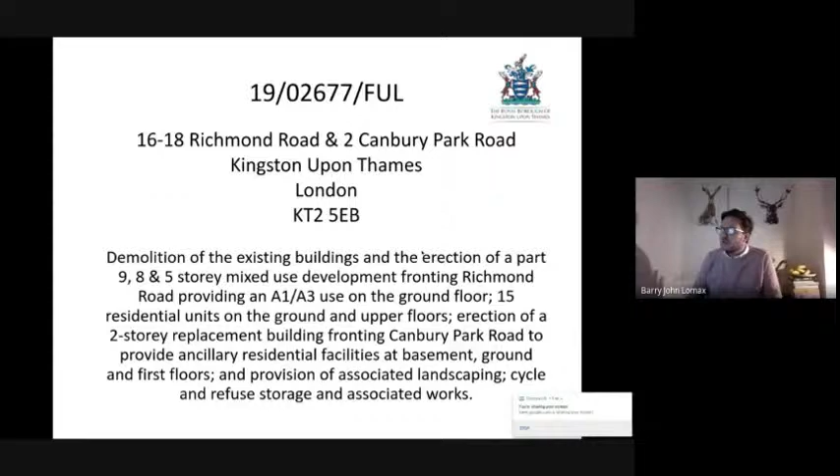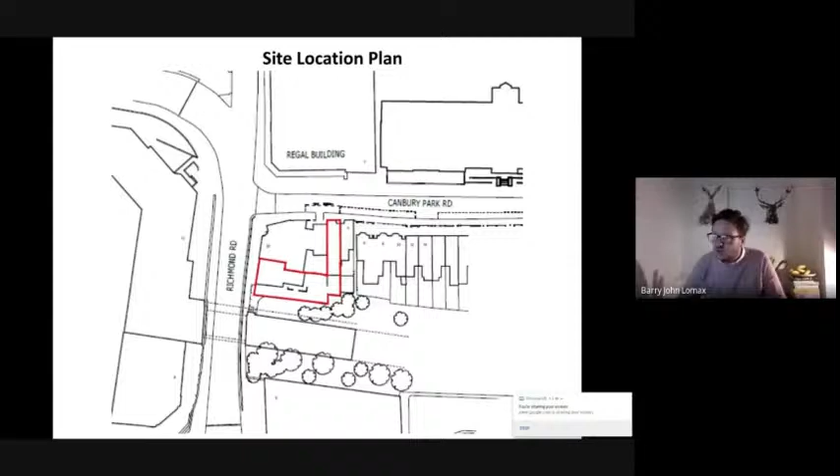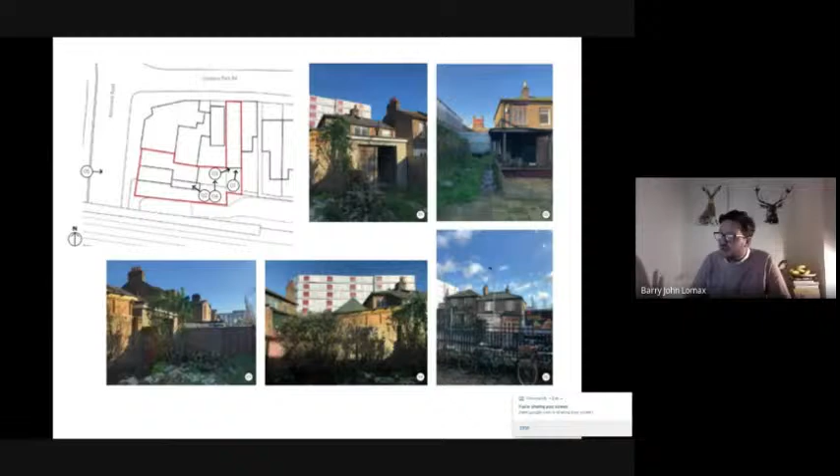If I take you around the top, you see number 1, the rear of number 2 Canbury Park Road. Going around number 2, we have another view inside, this time pointing back towards the Richmond Road properties. Then we have a view from the railway station, and 2 other views from within the application site looking towards Canbury Park Road. This is a clearer photograph, showing the rear of 16 to 18 looking towards the railway station. And this is a site looking towards a building being constructed on a neighbouring property, as part of the tattoo parlour.

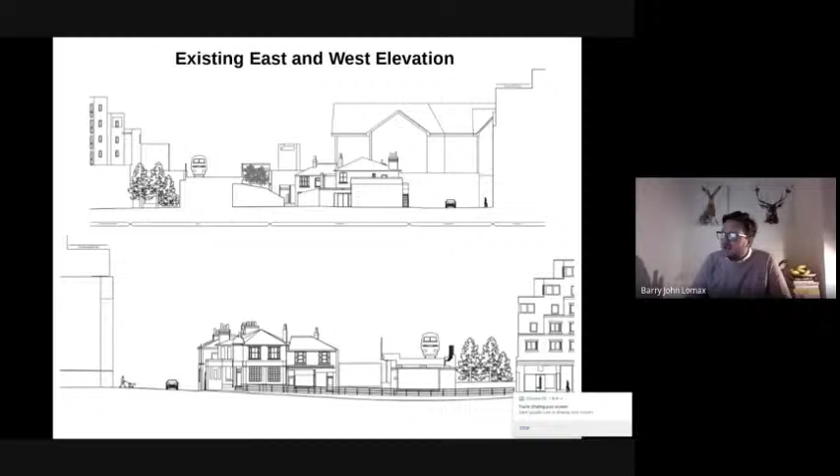So the existing site plan, and then some existing elevations going around the site, and then we come to the proposal. The proposal is for the demolition of the existing building and its replacement with the erection of a Part 9, 8 and 5-storey mixed-use development fronting Richmond Road. Also included is the erection of a 2-storey replacement building, which would be connected to number 4 Canbury Park Road, so as to provide the second half of the semi-detached properties, containing ancillary residential accommodation at basement, ground and first floors. There's then a retail cafe unit proposed on the ground floor fronting Richmond Road.

This would now be a Class E use, although if minded to approve, members might want to restrict it to a cafe retail use. There would be 15 residential units, of which 4 would be studios, 6 would be 1-bed, 4 would be 2-bed, and there would be a 3-bed unit. The application proposes the provision of a single affordable unit, a shared ownership 1-bedroom, 2-person unit, and cycle parking for 25 spaces, 24 within a dedicated store and 1 within a dedicated space within the courtyard of unit number 1.

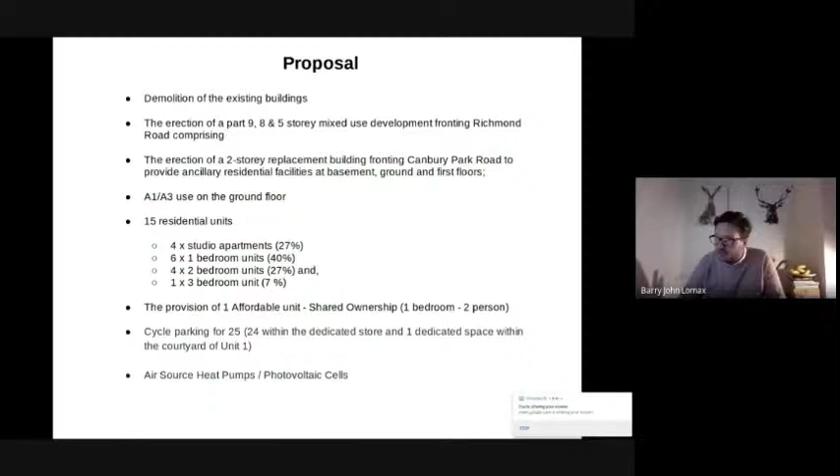The property would be served by air source heat pumps and by photovoltaic cells. If I now take you through the plans in slightly more detail, this shows the proposed site plan.

Starting from the basement of the property on Canbury Park Road, this would be ancillary accommodation which would house some of the servicing, the mechanical and electrical equipment.

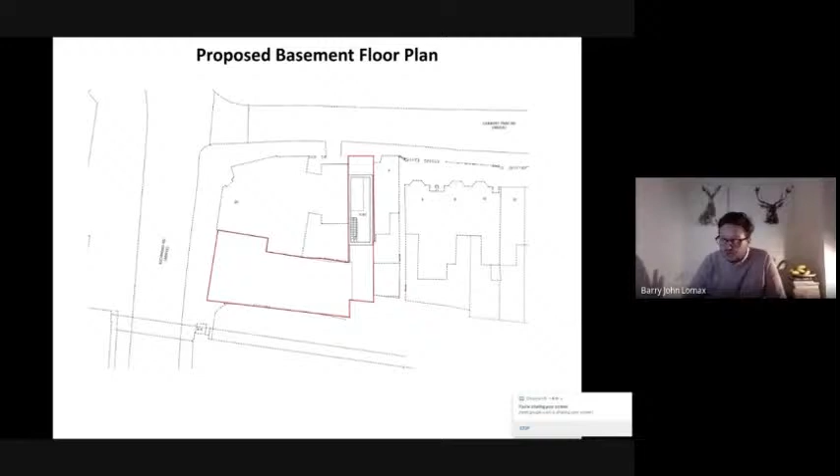Moving up to the ground floor, residential access would be provided from Canbury Park Road through an entrance where you would meet the refuse store, an entrance to the refuse store, and then around into the residential property with a studio unit on the ground floor with a terrace, some communal space, and then the cycle storage would be in that building fronting Richmond Road.

The access to the retail space or the retail unit, the A1, A3 / Class E unit, would come from Richmond Road.

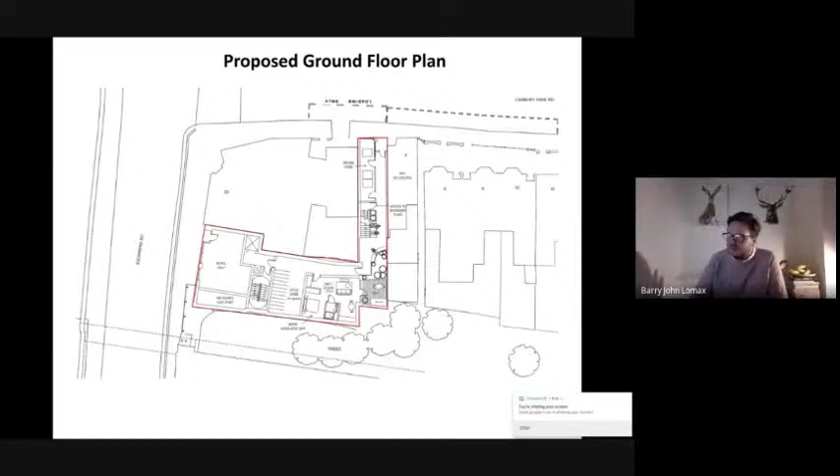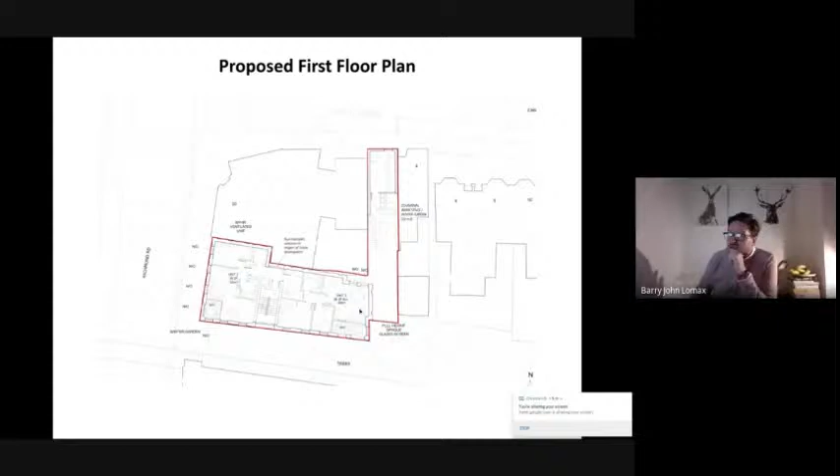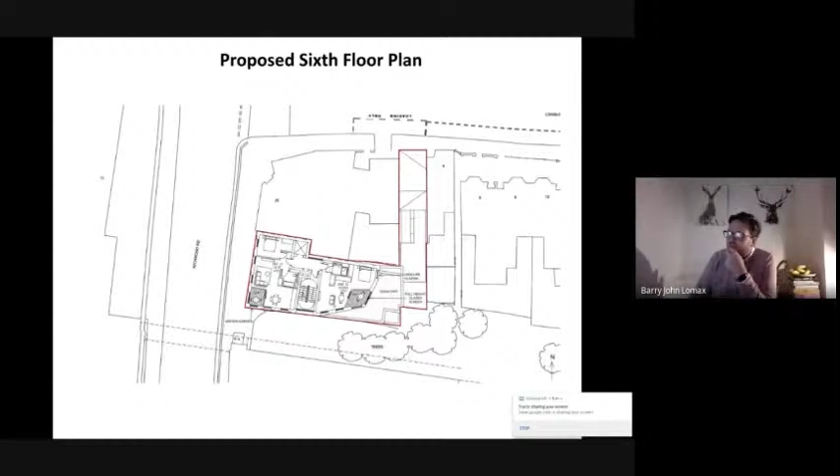Moving up on the second floor, with residential accommodation coming through the floors, and then stepping back when you get to the 5th floor, 6th, 7th, and then at the 8th floor, you have a further step back and you have a terrace space for the uppermost flat.

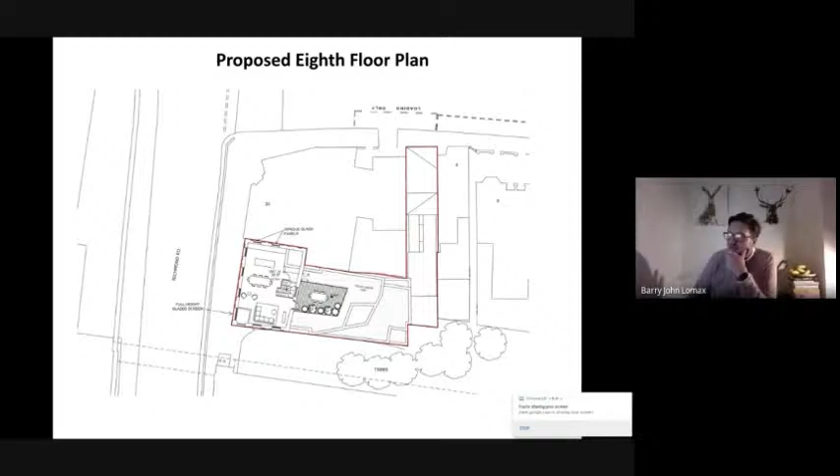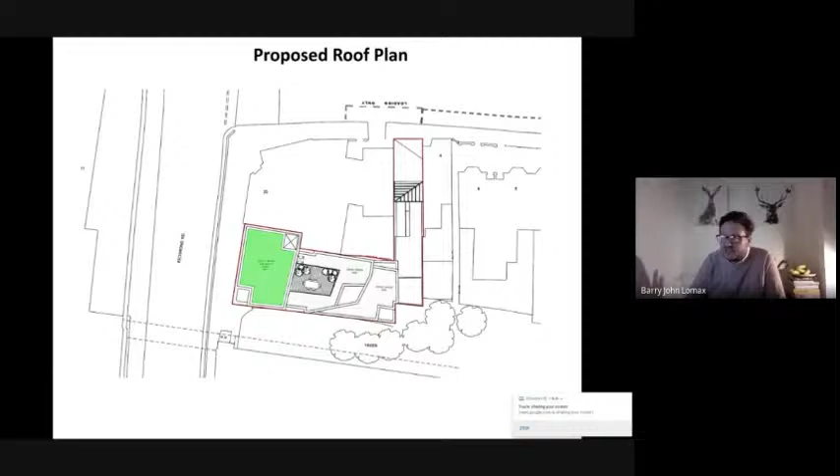We have a proposed roof plan. All of the flat roofs are proposed to be green or brown roofs as part of the drainage or the surface water drainage strategy. A proposed section through the site showing this is taken from the railway line cutting through the site.

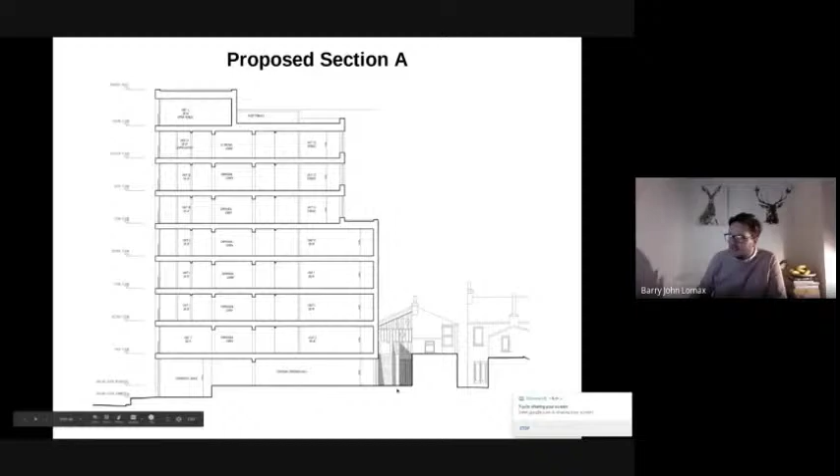You see on the right hand side the property number 2 Canbury Park Road, which would at the first floor be that communal space, at the ground floor refuse with access to the side.

This is the proposed west elevation, the elevation which would front Richmond Road. The proposed building at its height, at its maximum, would be 28.4 metres and it'd be 10 metres wide.

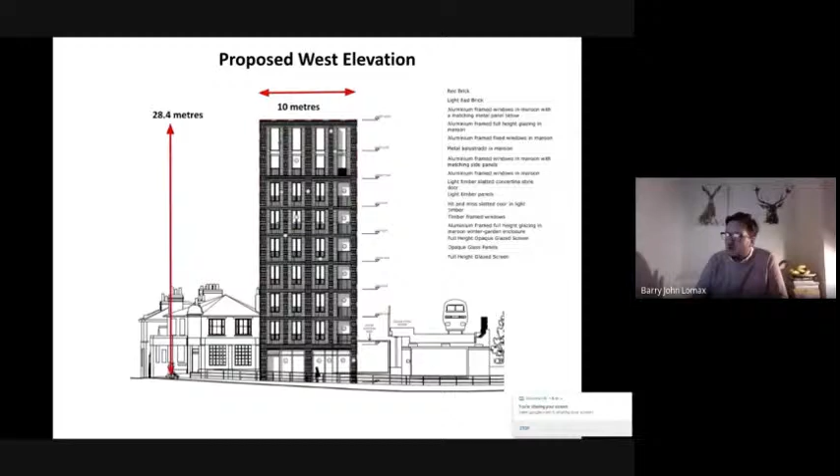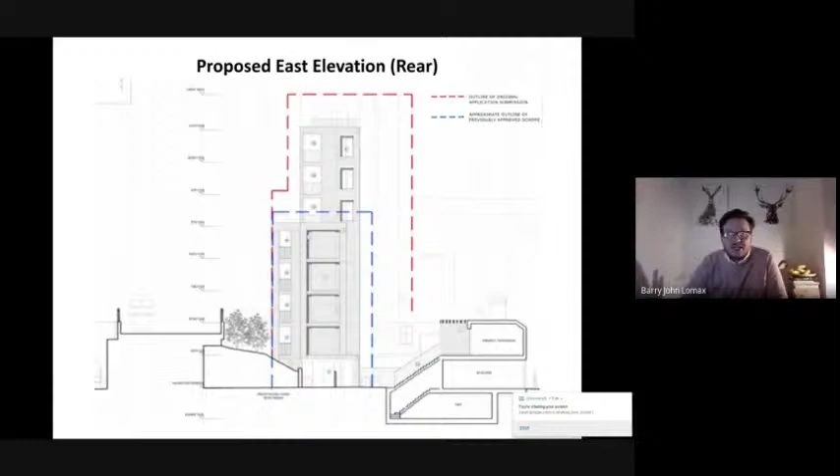Looking at the proposed elevation to the rear, this plan indicates in red the scheme as it was originally submitted. Unfortunately this plan isn't very clear, but other plans will become clearer. The blue indicates the scheme which has consent on site granted at appeal.

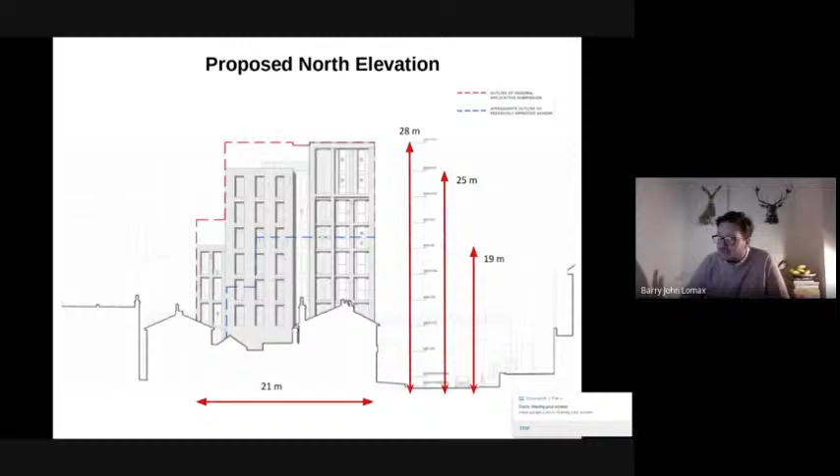This is taken from the north elevation looking back. You see again the maximum height around 28, dropping down to 25 and then down again to 19 metres with a depth of 21 metres.

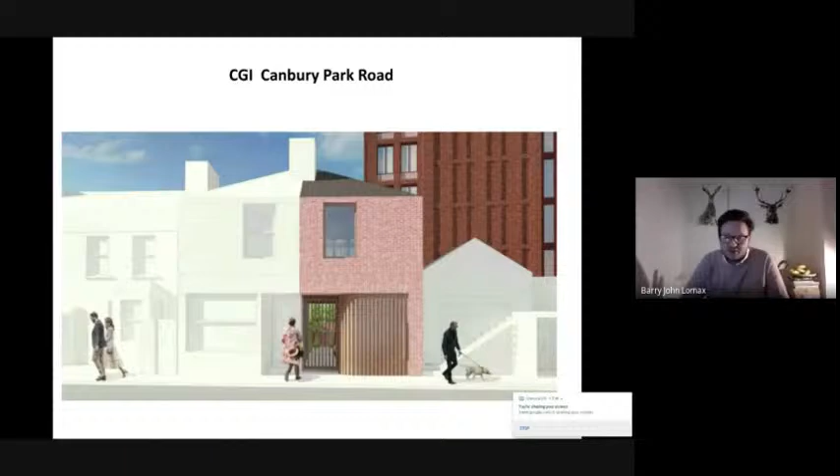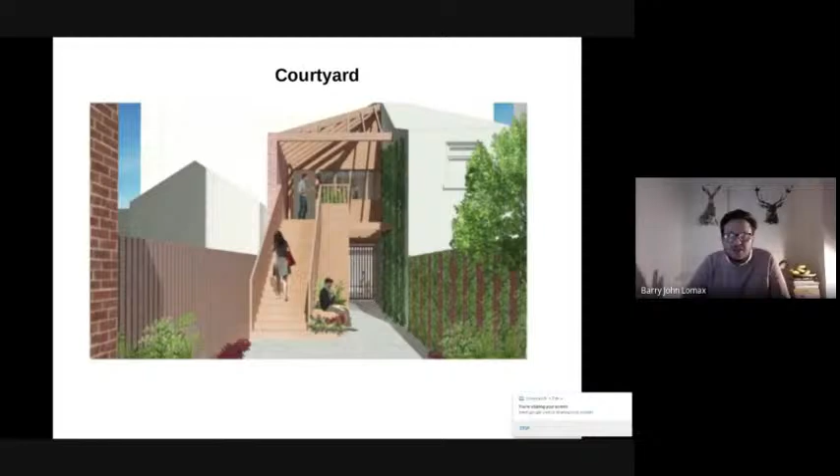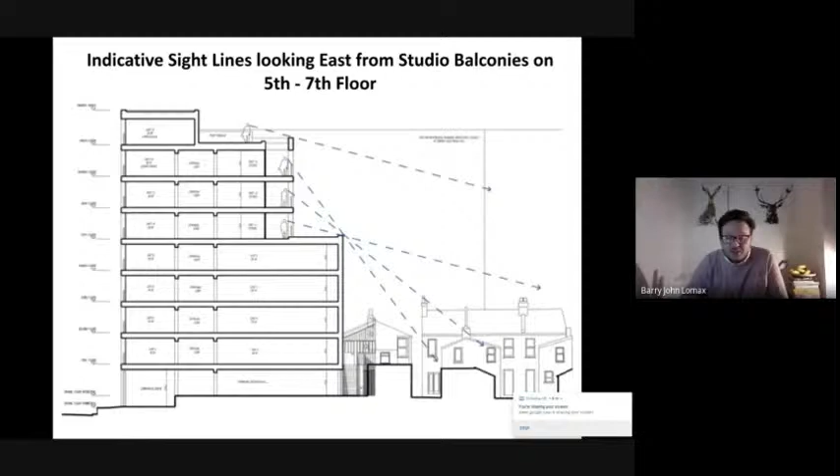On screen now, you see the indicative sight lines looking from the Studio Balconies and looking down to neighbouring properties, showing that there would be limited intervisibility, and especially as we would see from the plans, that most, if not all, of the windows on the rear elevation are obscurely glazed. Visibility from this site is generally to the south and to the west across Richmond Road.

What you see now on screen is a photo montage of the proposed scheme outlined in grey in the centre of the image. This is a photo montage taken from the rear gardens of Canbury Park Road, showing the image that would present itself if the scheme were to be permitted. The blue line indicates the approximate height of the previously approved scheme.

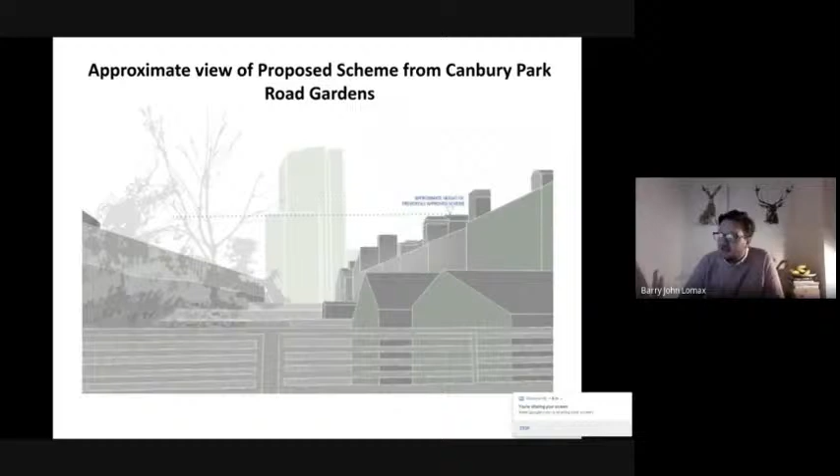If I now take you around some of the photo montages, this shows the scheme. The windows on this elevation are proposed to be opaque and non-openable. That is to ensure, in line with the agent of change principle, that the residential units wouldn't conflict with the public house use on the corner.

And then on the front entrance, owing to air quality issues, the ground, first, second and third floors would be non-openable on this side and served by mechanical ventilation, with windows on the southern side being openable.

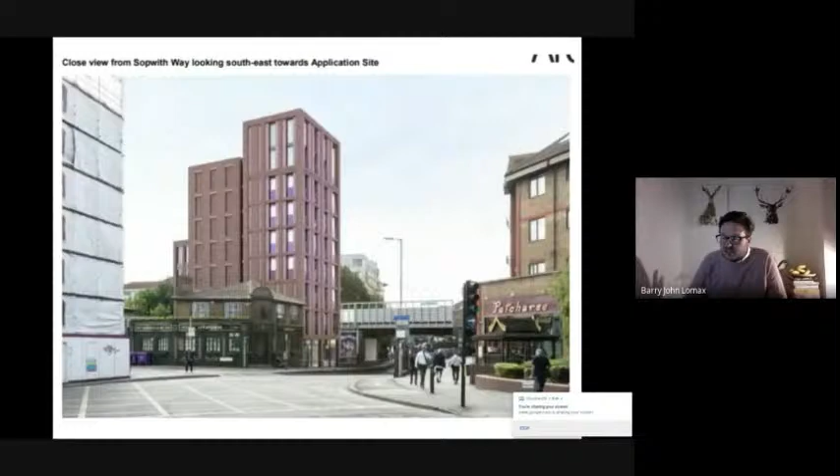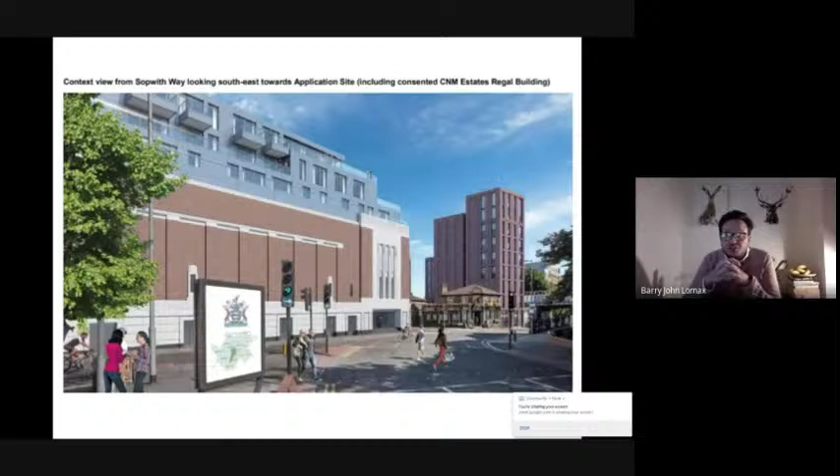This image on screen now places the approved scheme at the Gala Bingo site next to the proposed scheme at the application site, and again from slightly closer proximity.

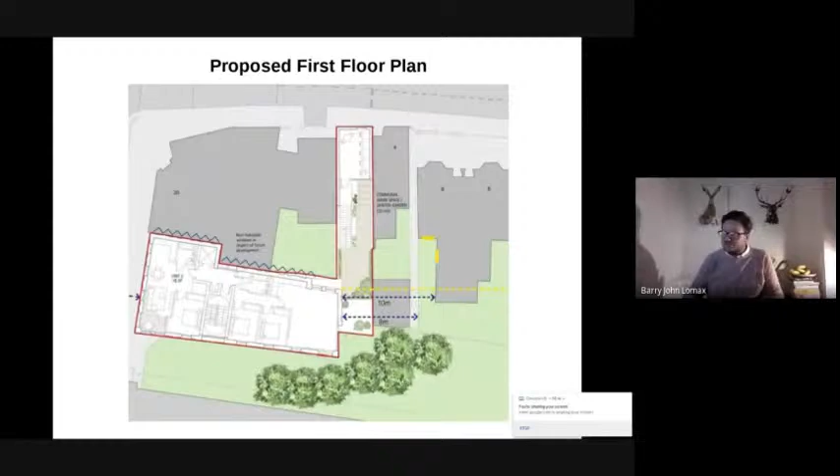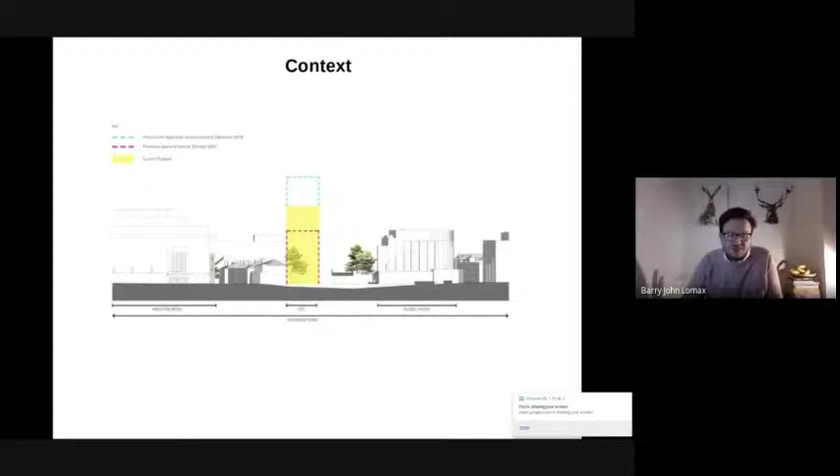What we have on screen now is a street scene image showing in red the previously approved scheme, in blue a previous scheme submitted on this site pre-application, and in yellow the scheme we have in front of us. You'll note that in terms of heights along the street scene, it is comparable to the proposal at the Gala Bingo site, or the permitted scheme at the Gala Bingo site, and Quebec House.

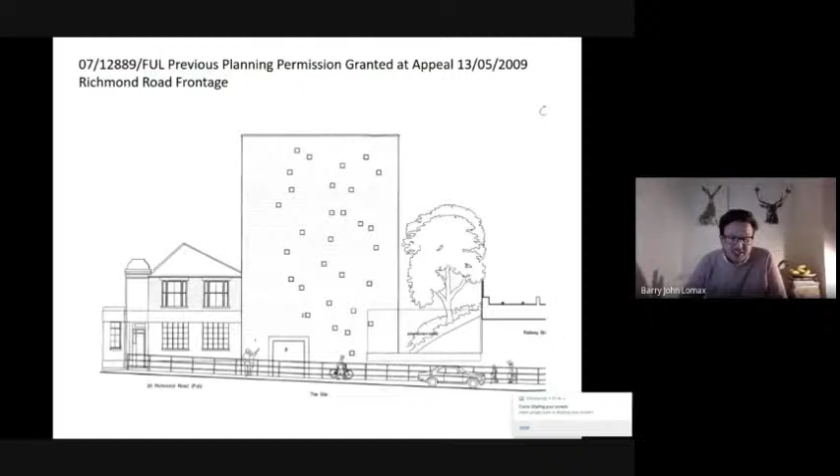On screen is the scheme which was permitted by the inspectorate some time ago. The applicants have discharged their conditions with regards to that scheme. What they haven't done is demonstrate that they've commenced the scheme, and in the absence of any compelling evidence, officers aren't certain that the scheme has been commenced. However, this is a scheme that did gain approval by an inspector at appeal.

If I take you now through some of the key considerations and key matters, first is, of course, housing delivery. Members will be aware that the authority is unable to demonstrate a 5-year supply of deliverable housing sites, and as such, like many other authorities, finds itself in a tilted balance scenario.

The tilted balance scenario means that unless there are sufficient policies in the National Planning Policy Framework which indicate the scheme should be refused, the proposal should be approved unless the adverse impacts of doing so significantly and demonstrably outweigh the benefits. The application would deliver 15 units, which is a net increase of 13.

It is acknowledged in the report that the proposal only includes 7% 3-bed units, below the 30% policy requirement. However, the viability assessment submitted, in conjunction with the requirements for affordable homes, demonstrates that delivering more 3-beds would render the scheme unviable.

The viability assessment also assesses the affordable housing position and demonstrates that whilst the scheme at a profit level of around 17.5% would not be able to deliver affordable homes, the developer is proposing one affordable unit, and as a result is accepting a reduction in profit levels.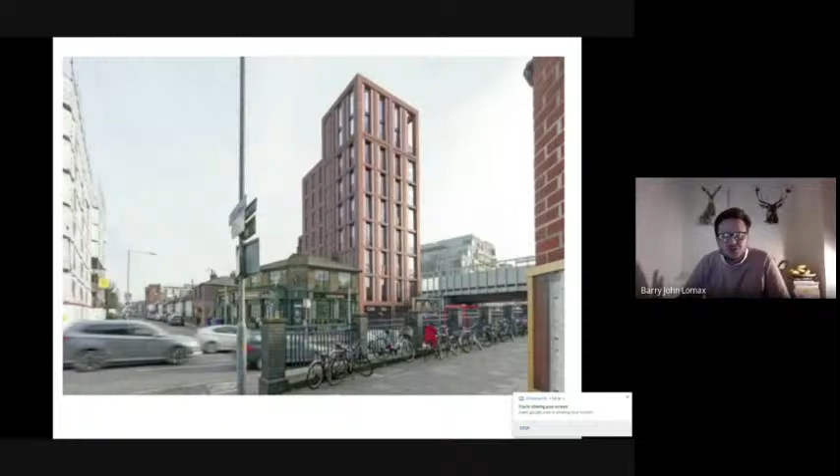Initially, there were concerns about air quality from the ground to the 5th floor on Richmond Road. However, a revised report with more realistic assumptions has been agreed with the environmental health team, who consider that problems remain but only from ground to 3rd floor, and that units fronting Richmond Road will have sealed windows and be served by mechanical ventilation. However, they would have access to openable windows along the southern elevation.

It is acknowledged that the southern elevation would open out onto the railway line, and therefore, as identified in our report, the residential quality of these units is compromised compared to a unit not next to a railway line. However, following discussions with the environmental health team, both acoustic and air quality, their advice is that the standard of accommodation would still meet the relevant levels.

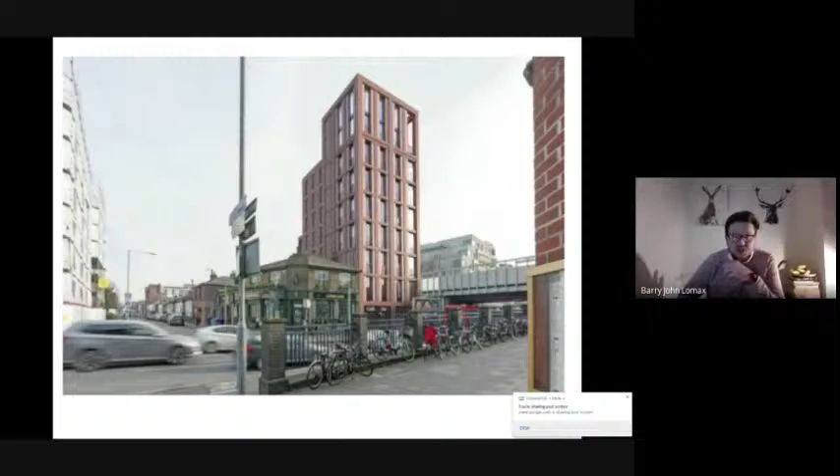Turning to daylight and sunlight impacts on neighbouring properties. There will, of course, be an impact on daylight and sunlight. This is a building of 9 stories, and there will be an impact on the gardens and properties on Canbury Park Road. However, those properties and gardens have been assessed in line with the Building Research Establishment guidelines, and the results are that the windows and properties all pass the required levels. There is one window in number 6 Canbury Park Road which serves a galley kitchen. Galley kitchens, as set out in the report, aren't treated as habitable accommodation, and there would be a significant impact on that galley kitchen, but it would still receive adequate levels of daylight for the type of room the window serves. Mr. Chairman, that is everything I have.

The update paper contains additional information on air quality. It covers off a typo error with regards to cycle parking, and some of the conditions have been amended to reflect changes in how they've been worded. So the recommendation is as set out on screen, and that is to grant permission subject to the legal agreement and the conditions set out in the report and as part of the late material.

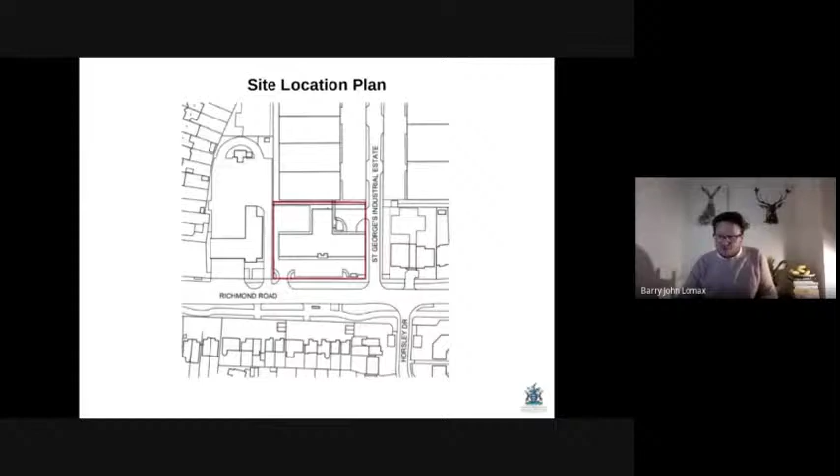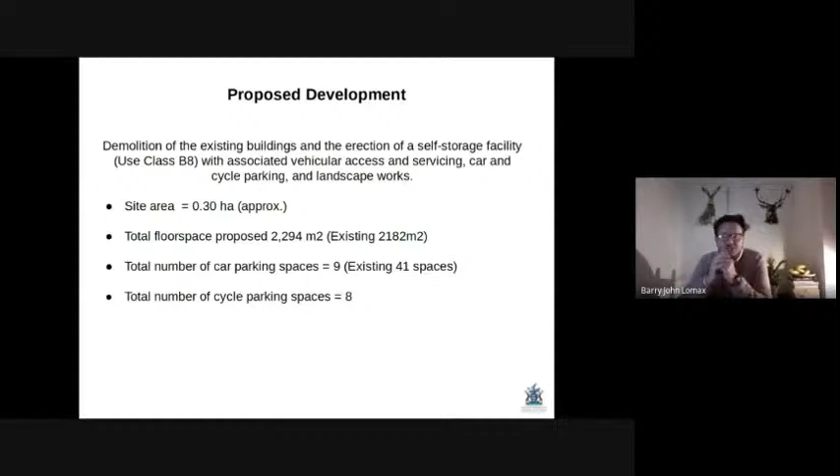That is comparable to the existing floor level on site. Total number of car parking spaces is 9. That is a reduction on site, but that reduction mirrors the change in type of use of the site. And there are 8 cycle spaces proposed.

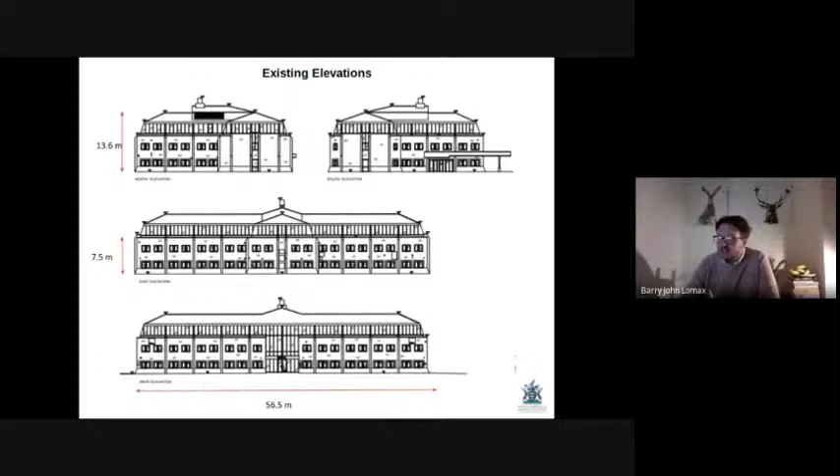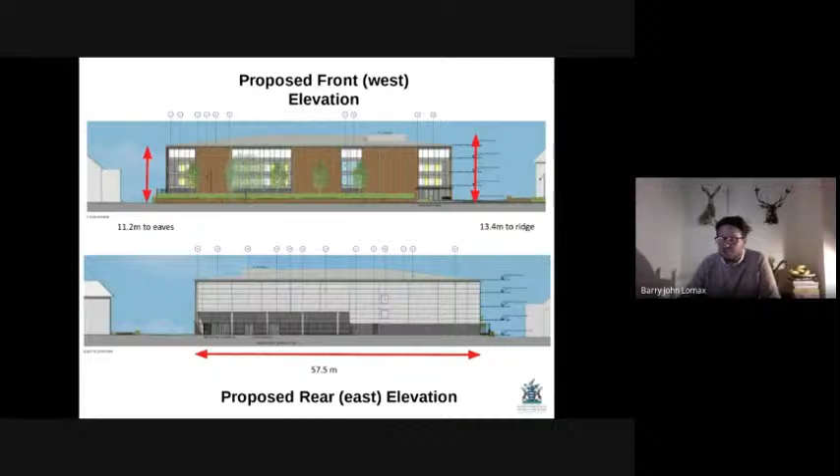And the building, in terms of its rear elevation, its width and depth is at 57.5 - its width, rather.

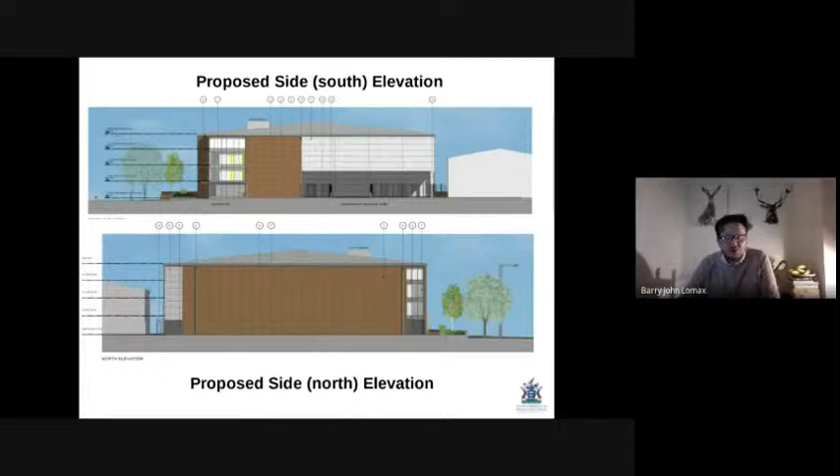You see now the proposed self-storage with the proposal to landscape the front. It is acknowledged that this building will stand forward of the existing building, as you notice, it comes forward. However, it comes forward to create a building line which is commensurate with the neighbouring flatted accommodation. So whilst it moves forward from where it is now, officers consider it wouldn't represent an incongruous or discordant feature in the street scene.

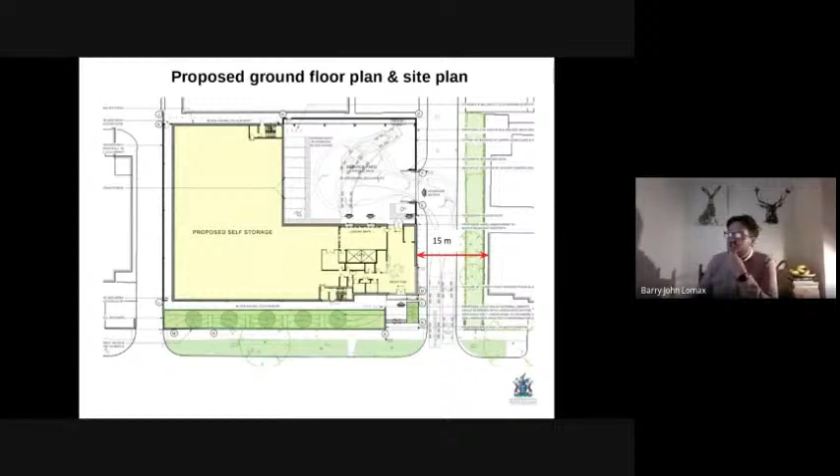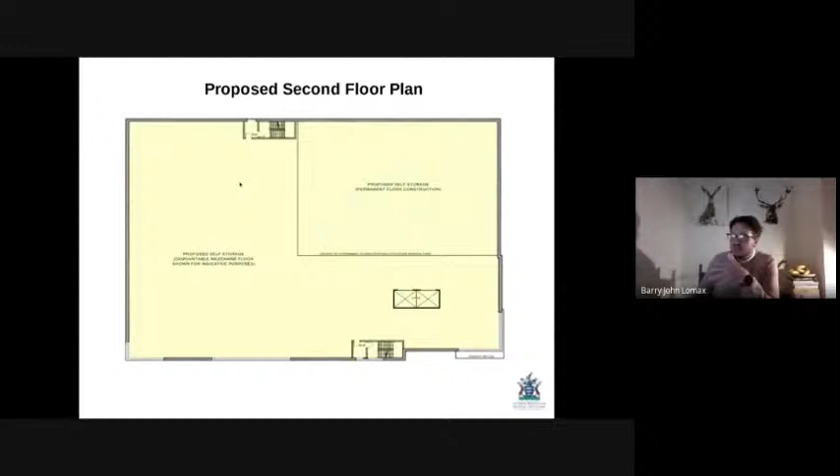The site will be accessed from within the industrial estate with parking to the rear within the service yard, with self-storage on the ground and first floor. And then as you move from the second to the third floor, this area indicated on screen is the proposed self-storage. That is an area that would be able to be taken up with demountable mezzanine levels as storage requirements dictate, or as the customers would dictate.

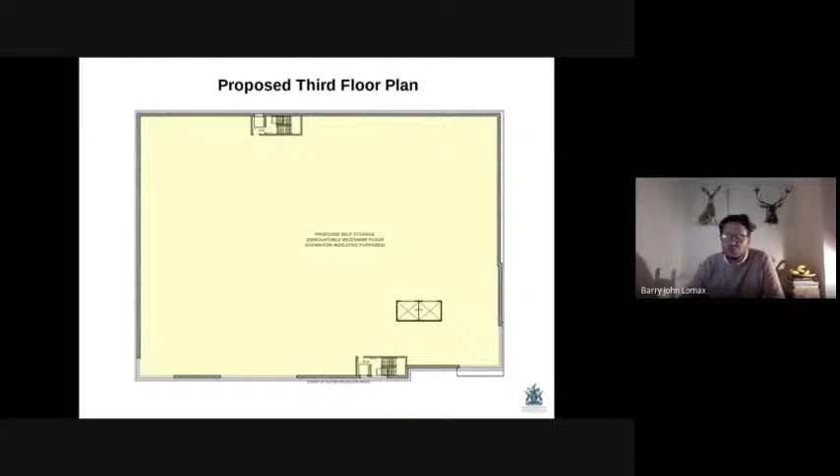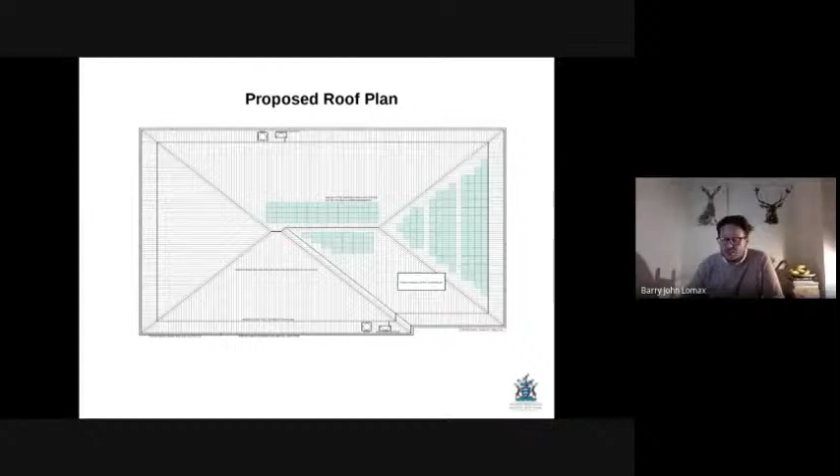Moving to the third floor again, which would be a demountable mezzanine floor, and then up to the proposed roof. The roof is a hipped roof with photovoltaic cells for the sustainability requirements.

Some of the key areas here to look at: this site has an employment use protection policy, DM17 of the local plan. This proposal again would be an employment use, albeit a different use to what it is at the moment. It is acknowledged that in terms of direct employment, there would be a reduction from direct employees.

The Quod projections - Quod being a consultancy - suggest that between 80 and 275 jobs could be supported through this scheme if approved, and that variance depends on the level of mezzanine flooring that would be accommodated within the building. So in terms of direct employment, we're looking at about 3 to 4 if the scheme would be approved, with off-site supporting a significant increase in jobs.

One thing to bear in mind, and we have touched on this slightly previously, government have changed how we might look at use classes in areas such as this, with a move from what would be a B1 use to now being in an E use. That indicates that the government are supporting a more flexible approach into how one would support employment uses within areas such as this, with greater flexibility to move between previous use classes.

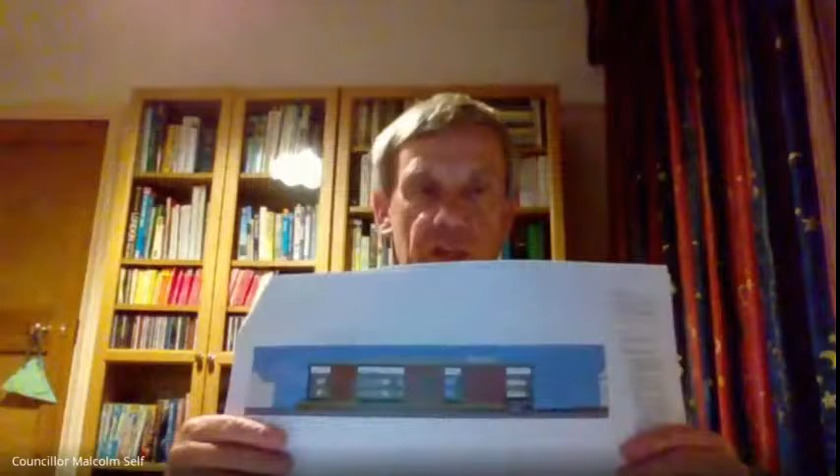Thank you, Roy. This is not a CGI, we've got these coloured drawings - that's all that I've seen, I haven't seen a CGI. We haven't got any CGIs, have we, Barry? Sorry, let me just see whether I can share my screen again. It might not let me.

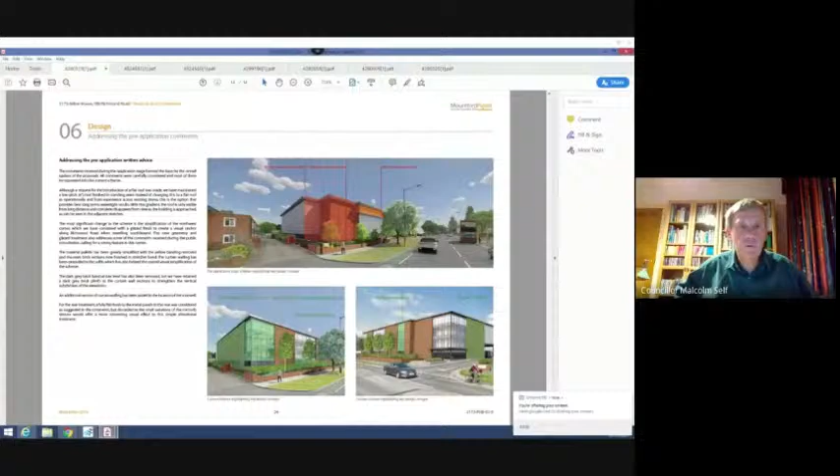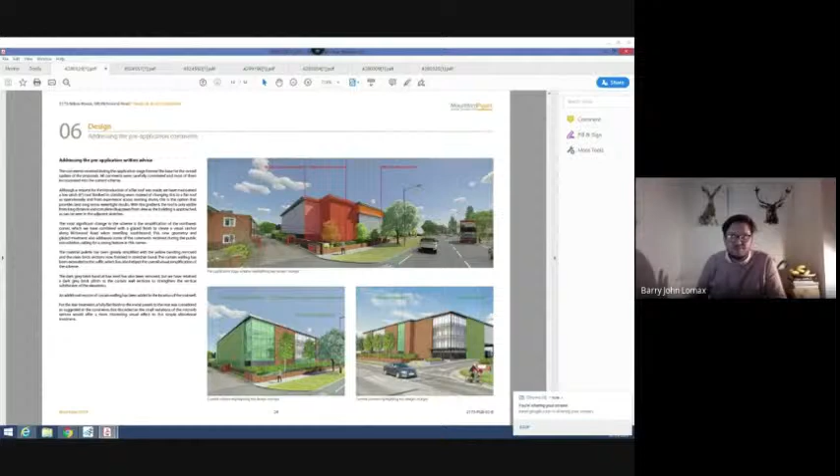Oh, now we have. So this is more - this is what the building was originally proposed, before. You see these panels of red bricks on the front. Previously it was more of this cladding elements and there was some brickwork, but now there's a significant improvement in that brickwork and the glazing. Thank you, Mr. Chairman. Okay, thank you, Barry. I think that's the best that we're going to get this evening, so hopefully that's helped a bit, Roy.

Before we go to comments, I'll formally move the recommendation on pages B12 to B20, and any changes in the late material. In doing that, I'm not passing any comment on the merits or otherwise of this application. I will ask for a seconder to be absolutely sure of this. Do we have a seconder for that? Yeah, I'm happy to second. Thank you, Kim. That moves us on.

We can now go on to members' comments and debate. And I got David - David, was that...? I'm not sure whether that was to follow up on the point that Roy made as a question. Keep going. Yes, over to you, Dave.

I would like to follow up to Barry the question that Roy made about the look of it. I do appreciate that any occupant will want to put publicity on their building, but some of the rather garish yellow signs which seem to have gone up on other developments - I've been looking around at other developments and I haven't seen any large signs on any of the drawings we have seen. That's not to stop an applicant making an application for it, but my question to Barry is, has he had anything regarding large signs, and if we were to approve it, would we be able to make a condition on the size and general appearance of those signs, because I think to have a really large yellow wall along there would detract considerably from the ambience of the neighbourhood.